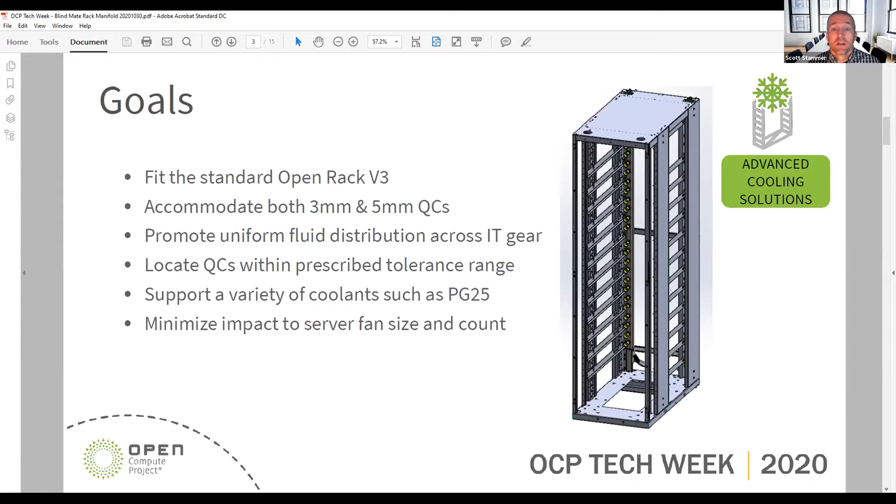So the interface to the rack is mounted to the top and bottom of the rack. And as you can kind of see in some of these views here, it's very compact. The details of the actual attachment method are still being worked out, but this is kind of showing that it would be mounted to the top and bottom frame rails.

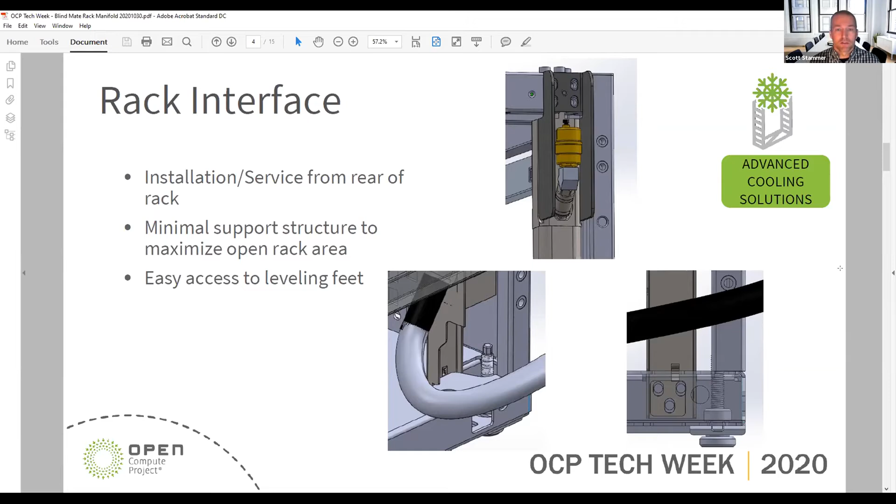Very narrow profile, again, to make sure that we're not obstructing any access to the equipment, trying to minimize the footprint here. And particularly on the bottom, really opening that up as much as possible to get access to that leveling foot. We realize that needs to be adjusted on every installation. So we want to make sure that a standard tool still has full access to get in there and adjust this leveling foot to level the rack without any obstruction from this manifold.

We're looking at rear cross supports, so some supporting channels that would go across and help transfer that load from the QDs through the manifold to these cross members, which will then tie it into the rack. What that's going to do is really stiffen this manifold to help ensure that these QDs are located where they need to be, both from a tolerance standpoint and loading, and make sure that we're always getting good connections there.

And because we have that structural tie to the rack, that allows us to simplify the manifold structure. We don't need to build in all that cost and complexity to that manifold. We can put in some simple cross members and tie that whole system into one integrated unit. And then a possibility is to have some adjustability to that connection from that cross member to the manifold, and that will really allow it to be dialed in case there's any variation in the rack or the manifold or different things at the installation. The customer can adjust that to really put that manifold exactly where it needs to be to make that good connection.

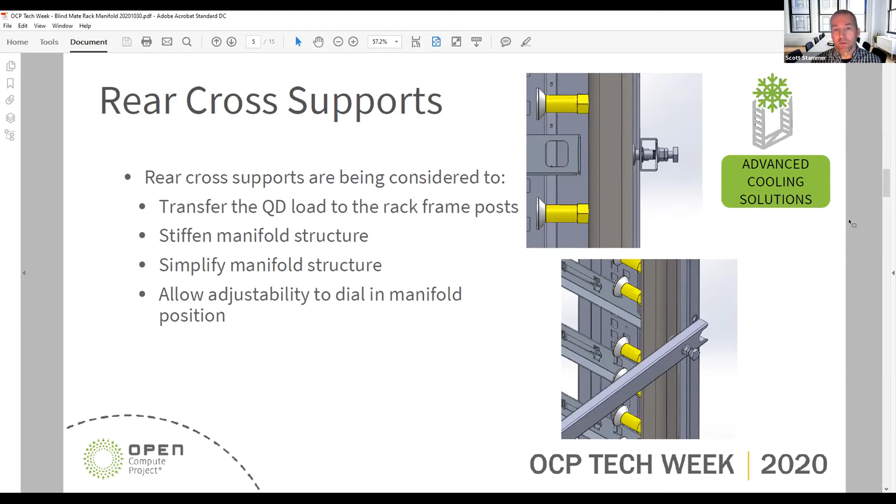So as we've talked about, the tolerances are key. There's definitely no understating that here, that tolerances on a blind mate connection are critical. And not just because of the position, as Tim referred, we need to make sure that these are aligned within the gatherability of the QCs, but also that this is robust enough that it doesn't deform under load.

There's a spring pressure inherent in the QD mechanism itself, as well as the water pressure. There's water pressure trying to force these two QDs apart. You put those two together, water pressure and spring pressure, multiplied by a rack full of QDs, and you've got several hundred pounds of side load on this manifold, and this needs to be able to resist that.

Because as it deforms under that pressure, these QDs will start to extract from one another, and there's quite a bit of allowance for variation in that, but at some point, if it pushes out too far, it actually starts to close, and then you're going to lose flow. So we want to make sure that we stay within that range where it's going to be reliably mated and within the tolerances and have good continuous flow through all the QDs.

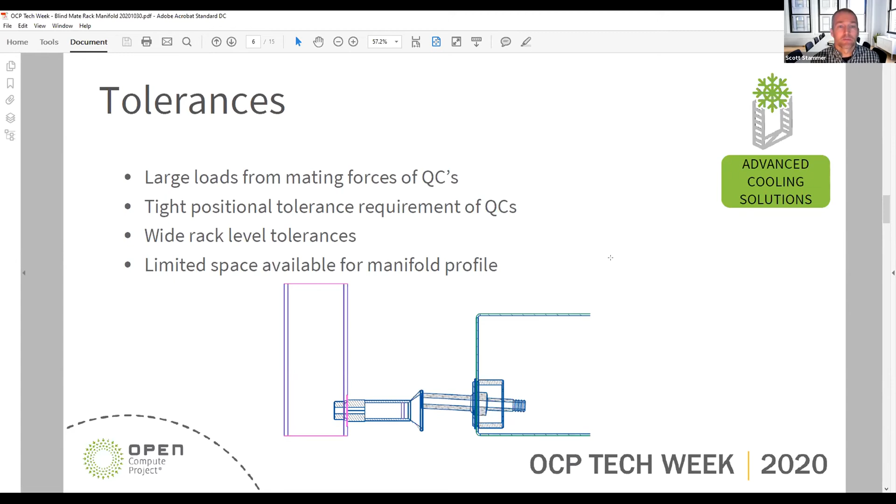And there's, again, wide rack level tolerances. These are sheet metal. They're very good quality racks, built very well. All the components are very good quality, but there's naturally tolerances in everything. You stack all those up, and this needs to be able to make it between the QD and the manifold. Everything needs to be able to handle that variation. And again, we have limited space for that manifold profile. We want to make sure that we keep it as open as possible for IT equipment access.

Glenn mentioned the vent. We do have that integrated in the top of this. This is kind of showing how we have this support structure around it that, besides performing the structural attachment to the rack, it's also providing some encasement for this vent so that during handling, this is going to be a very large, heavy assembly. We want to make sure that that vent doesn't ever get banged around and damaged. So we've got these flanges that will help protect that.

And that's designed to accommodate a variety of manufacturers' products. It's not tied into one vent manufacturer. We want to make sure that we have a lot of flexibility there. And it's easy to replace. We mount it on a quick connect so that you can easily pop it off and you don't let any air into the system. You don't have to drain the whole system just to replace a vent if there's ever a problem.

And another benefit of that QD is that you have a place to attach the purge hose or fill hose. If that's what you'd like to do during initial commissioning, you can remove the vent, pop that on there, and that oftentimes is a much quicker way to fill this. And then in production, if you want to put the vent back on, then that will take care of any air that happens to make its way into the system over time.

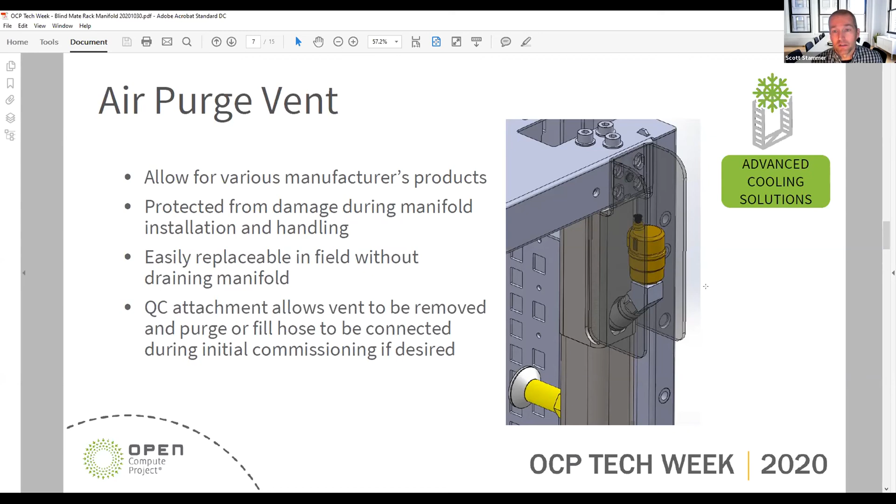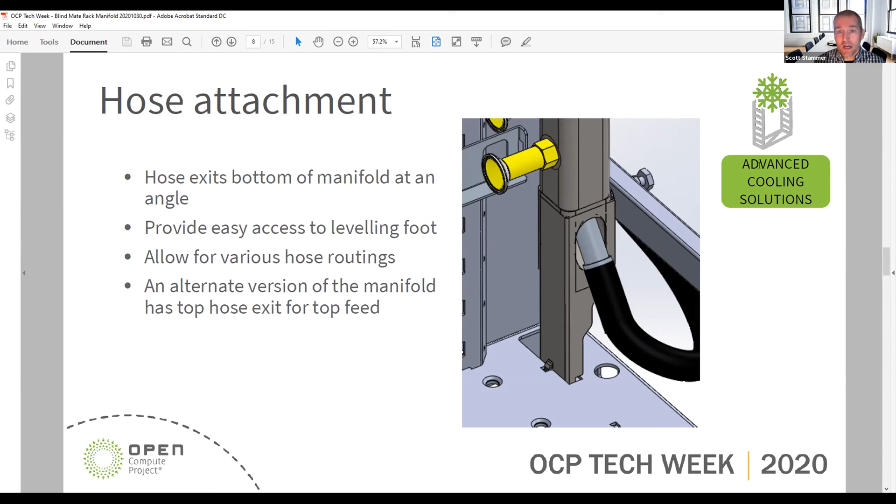Hose, as a standard product, will mount to the bottom. It exits at a side at a 45-degree angle from the bottom of the manifold. And that really allows a lot of flexibility in where this hose gets routed to be able to go to either an in-rack CDU or row-based CDU, as well as just make sure we allow access to that leveling foot again. And there is another version of this that will have a top feed if you want to do a ceiling manifold. That is an option.

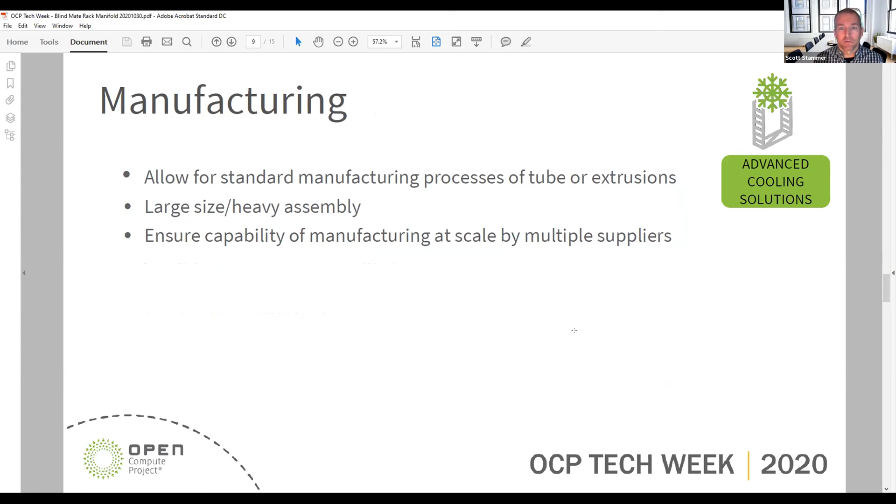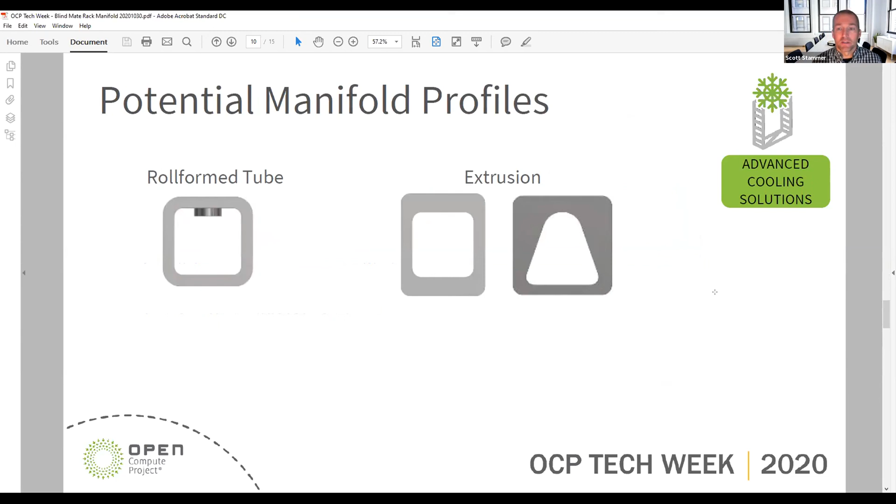Manufacturing concerns, again, it's a very large, heavy assembly. We want to make sure that this is something that can be built in the spirit of OCP by multiple suppliers, that you don't have to have too specialized of an operation to be able to make this. And it could be made out of a roll form tube or an extrusion. There's benefits to both. So different manufacturers may do it different ways, but the end product will still be compatible and they'll perform the same function.

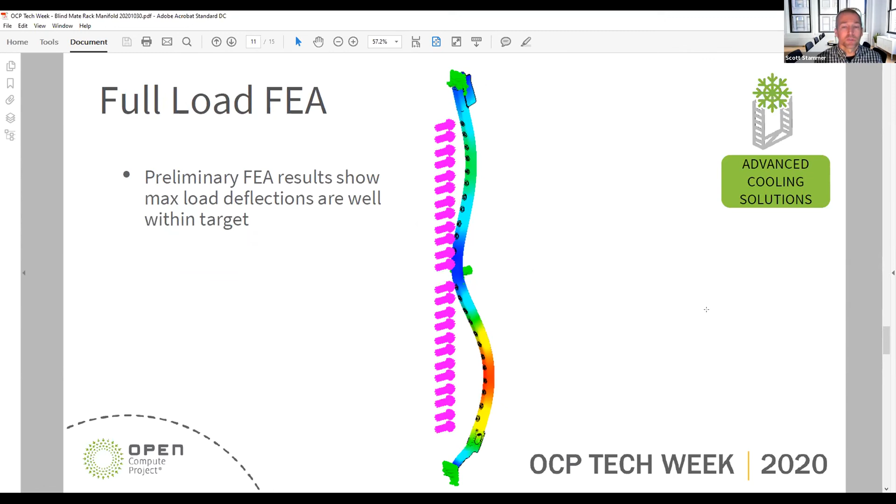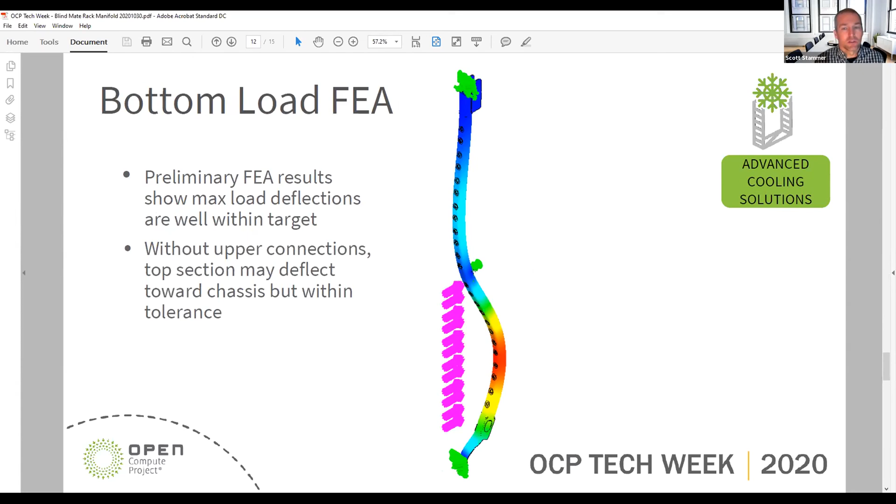We looked at FEAs of a fully loaded rack, to make sure that the deflections are still within the limits, no problems there. We also looked at what if only the bottom is loaded, because, assuming that there's only one center stiffener, the top of the manifold will actually bow in a little bit, but again, still well within the tolerances, so no concerns there. And then flow distribution, we looked at that to make sure that it's even flow. We used a variety of tools to accomplish that. And again, call to action, we definitely can use additional input from other members of the community.